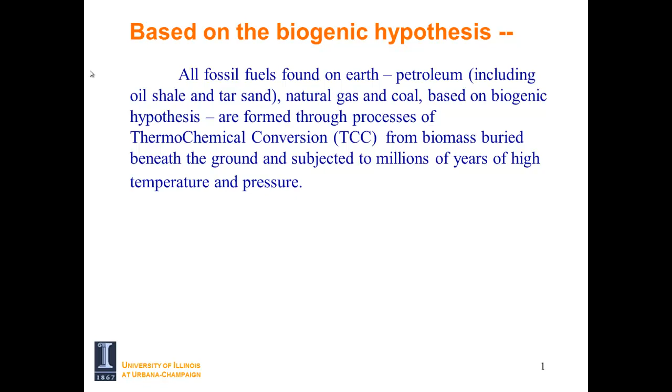I think agriculture's new opportunities lie in bioenergy and the environment. Based on the biogenic hypothesis, so far all fossil fuels found on Earth, petroleum including oil shale and tar sand, natural gas, and coal, are formed through processes of thermochemical conversion from biomass buried underneath the ground and subjected to millions of years of high temperature and high pressure.

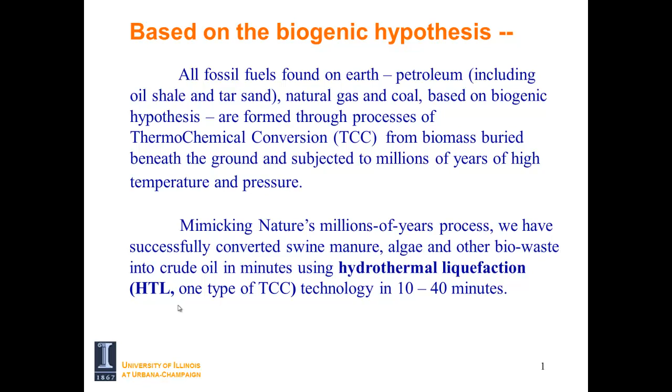We are able to mimic nature's millions of years process, and successfully converted swine manure, algae, and other bio-waste into crude oil in minutes using hydrothermal liquefaction, a type of thermochemical conversion process technology, in 10 to 40 minutes. This is a roadmap, a so-called environment enhancing energy roadmap.

First, we separate the biosolid from the bio-wastewater, and the solid is converted through hydrothermal liquefaction into crude oil, and the liquid is sent to the algae pond, together with the post-HTL liquid and nutrients, to produce a lot more algae biomass, and the algae feed back into the HTL reactor to produce more crude oil.

During this process, the oil contains carbon and hydrogen, and yet the nutrients, including nitrogen and phosphorus, are fed back and recycled during this process for algae growing. We will demonstrate later that this recycling process serves like an amplifier to magnify the biomass production.

We will use a case study shortly to demonstrate how this can produce substantial amounts of biomass and therefore crude oil, clean the wastewater and capture carbon, producing biofuel while at the same time cleaning the wastewater, capturing carbon, and improving our environment.

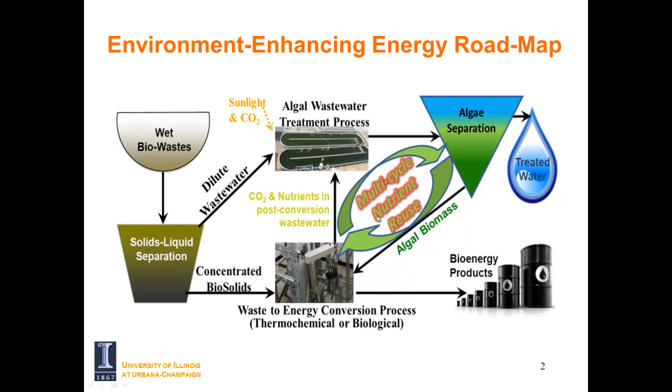Initial lipid content and HTL oil conversion efficiency are shown in these graphs, and we achieved an energy ratio of 3 to 1 to 11 to 1, which means we input one part of energy and we can obtain crude oil containing 3 to 11 fold of energy. So this is a paradigm shift from extracting oil from algae; rather, what we are doing is converting the biomass into crude oil.

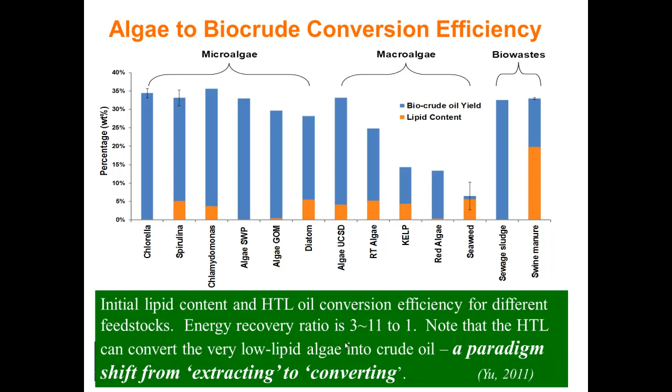This shows quickly a couple of things: the nitrogen uptake or reduction in the post-HTL wastewater, and nitrogen recovery in the crude oil. As the temperature increased, more nitrogen can be recovered in the aqueous product. And nitrogen recovery in the biocrude oil also increased, mainly due to the increase of its oil yield.

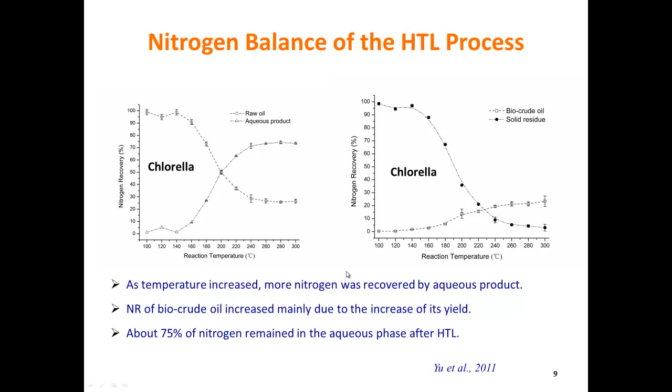We demonstrated here that about 75% of nitrogen can be retained in the aqueous phase after hydrothermal liquefaction, and therefore can be reused for algae growing. This also demonstrates our capabilities in this process for phosphorus recovery. More than 85% of phosphorus can be recovered, and the total nitrogen recovered during this process is more than 80%.

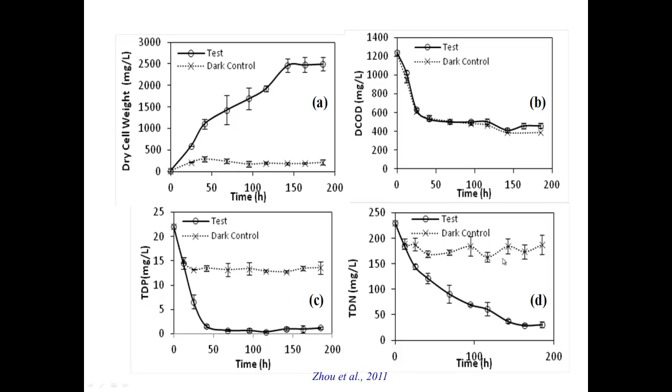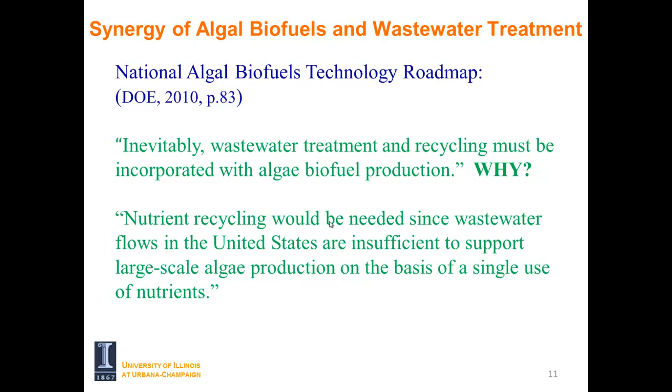Based on the National Algal Biofuels Technology Roadmap in 2010, the quote here: inevitably, wastewater treatment and recycling must be incorporated with algae biofuel production. Why? Because nutrient recycling would be needed, since wastewater flows in the United States are insufficient to support large-scale algae production on the basis of a single use of nutrients.

So this is our case study. Let's take a 1,000 ton per day wastewater treatment plant, which is about the equivalent of a 6,000 hog farm based on the volatile solid, nitrogen, and carbon content. So in this process, let's say it takes 1,000 tons per day of effluent, containing about 4 tons of suspended solids, 3.6 tons of carbon and 725 kilograms of nitrogen.

Again, this is the repetition of the environment enhancing energy roadmap. We convert it into crude oil, recycle the nutrients, clean the water and amplify the biomass. So let's see next. Of the effluent's total suspended solids, we can magnify this biomass about 10-fold, into 37.9 tons. This will produce 14.5 tons using our hydrothermal liquefaction process.

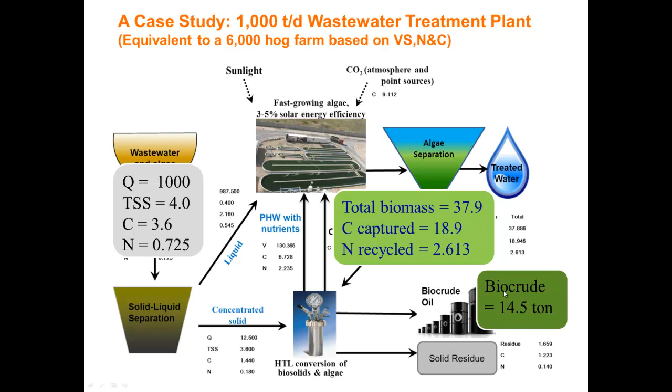And look at the numbers. Initially, we only have 4 tons of solid, and then we have almost 38 tons of additional biomass and produce this much crude oil, and we captured 9.1 tons of carbon from the atmosphere. So this case study demonstrated how environment enhancing energy is able to capture carbon, recycle nutrients, and produce a substantial amount of biomass. And in the meantime, we can produce large amounts of crude oil and clean our wastewater.